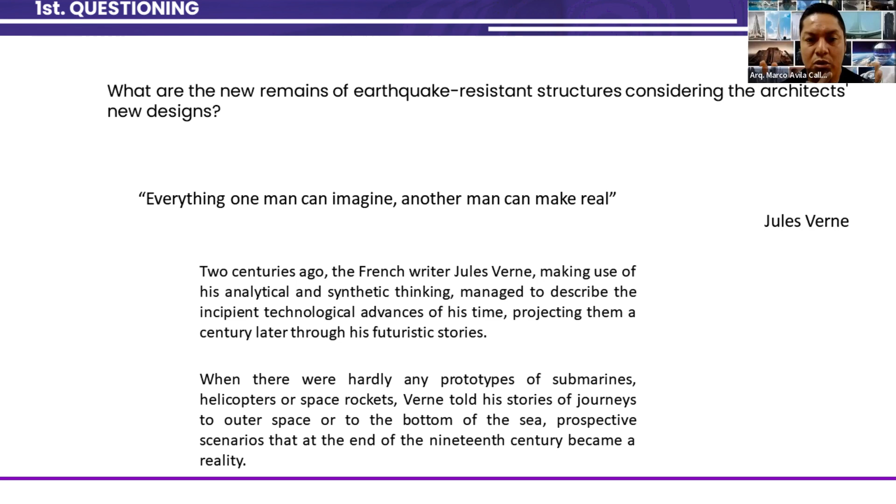In this perspective we begin our analysis. We want to know where the earthquake-resistant structure and the human being's habitat is heading in terms of the design of housing, in terms of the design of buildings, etc. For this,

considering these visions, we need to analyze theories. We had to analyze theories of the future and we basically based ourselves on 3. The first theory is Dator's theory, who mentions in his research a very interesting concept, because he considers that there are 4 possibilities in order to generate probable futures.

He says that there could be a first stage where the story or events continue without any problems, however there is always going to be a limit. If the human being remains disciplined in a certain way, it will continue without changing, but there will always be historical events that unfortunately generate a decline or a collapse of the social, cultural situation, etc.

And that has been seen through time. Several Greek, Egyptian, Roman cultures, etc., have declined due to an event, whether natural or human, but they also indicate that there could be another event that instead of causing a collapse, can transform and make this curve rise. This transformation can be new technologies, business factors, etc. This is the first theory we have studied.

The second theory on which we rely to make this analysis of the evolution of man's habitat is precisely the theory of Nikolai Kardashev, who indicates that there are 3 types of civilizations depending on the use of energy at the macro level, according to the scale. The first type of civilization, type 1, is that civilization that manages to satisfy its own needs by taking advantage of the energy issue of the planet. Maybe we are really struggling to get to a sustainable aspect.

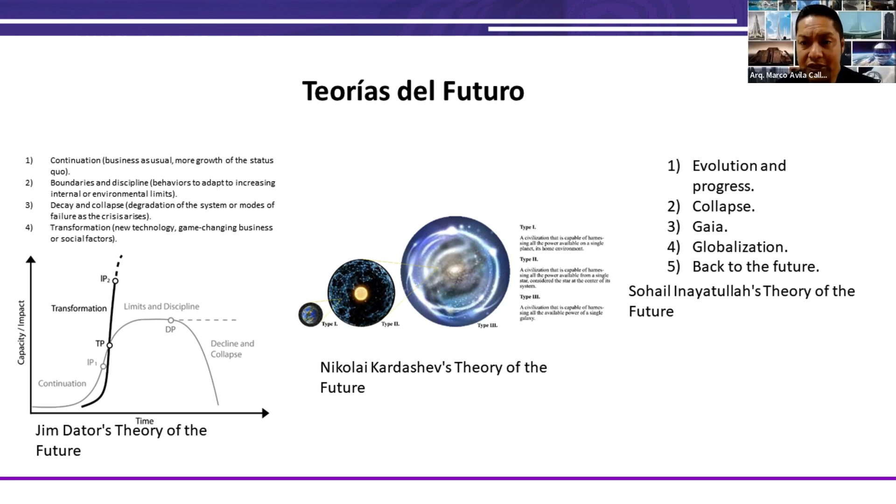And the third theory of the future that we have analyzed is the theory of Sohail Inayatullah, and this researcher proposes 5 scenarios through his research. He proposes a scenario of evolution and progress, a scenario of collapse, and a scenario known as Gaia, which we are going to analyze as globalization around the world. I will rather specify this last theory of the future of this researcher, because it is on the basis of this that we are going to work during this exhibition.

Well, once we have studied the theories already established, what we have done now is try to see how this could change the hypothetical future of human habitat architecture going forward.

These hypothetical futures have been based on Sohail's methodology, and each has been deepened. It has been shown that each of these scientific evidences has generated proposed scenarios with scientific content, based on the three theories of the future analyzed. Each has some similarities, and others have some differences.

However, based on the theories that each researcher handles, we hypothetically propose a future of chaos, a future of Gaia, a future of progress, and a future of evolution. These four futures are the ones we have proposed, and we want to see if they will be generated or not within a horizon of 2100.

Which one is this? What is this methodology for future studies that this researcher proposes? This methodology has 6 well-defined steps.

The first step is planning. The second step is anticipation. The third is the timing of the future. The fourth is to deepen the future. The fifth is the creation of alternative futures, and finally, the strategies to transform those futures.

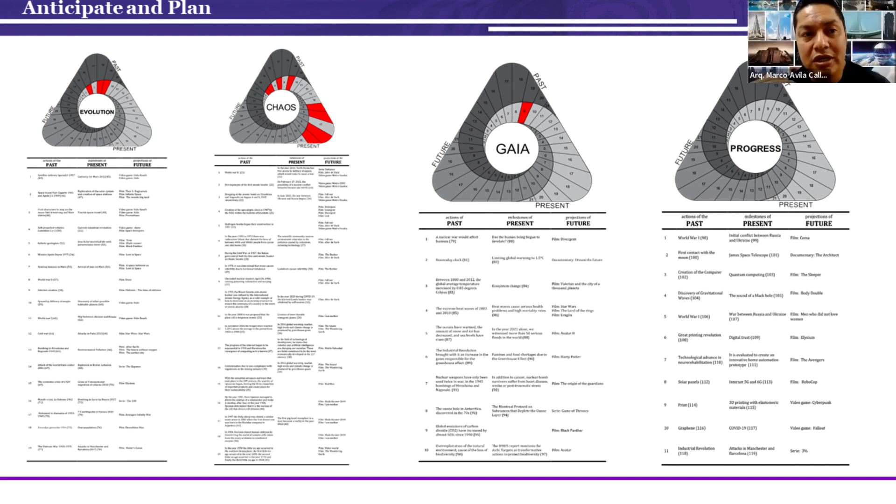In the stage of temporizing and deepening, after choosing these four great scenarios, we analyzed the stages, the times, the epochs of how they were generated, and what the important milestones were through history that allow us to build a timeline of chaos, of progress, of evolution, and of Gaia. For this, we made a representative image showing the present, the past, and the probable future, with a horizon towards the year 2100.

What does this mean? For example, in the past, in prehistory, we are placing the scientific evidence from the architectural point of view at each stage of history, and how these key milestones transform time and transform events to generate new conditions through history.

One of the most important milestones, for example, is the invention of writing. Obviously, the industrial revolutions are also key worldwide and have generated several milestones. We don't have the most important ones marked in blue here, but the ones in red color are the ones that somehow make the story completely change.

The first milestone in our study is number 18, which in this specific case is the first industrial revolution. The conditions branch out here: first, there's an industrial revolution that is fully developed, with the economic and industrial parts being technified, developed, and growing. But on the other hand, unfortunately, is the beginning of global pollution. Well, that's the good and the bad, isn't it?

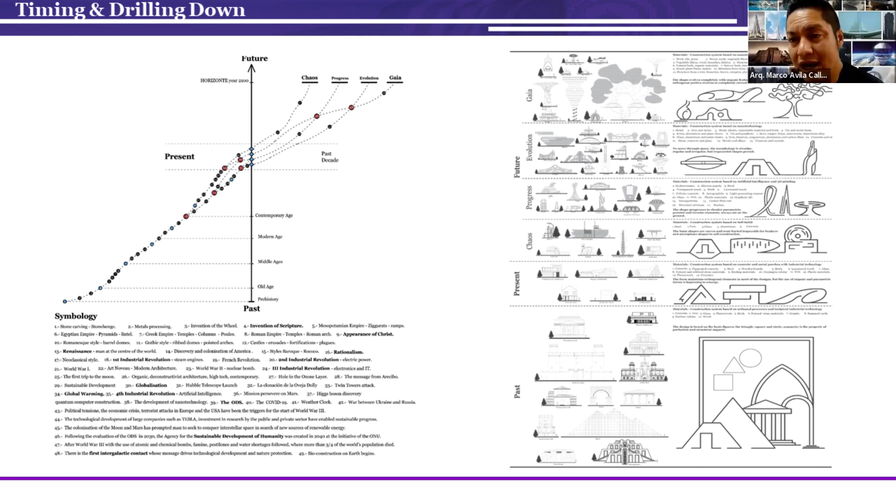That is why, based on the concepts and evidence, we have created these four scenarios. The first scenario is chaos, possibly caused by wars, pollution of the planet, global warming, etc. We would have to live in a chaotic scenario where architecture will have to change completely—a catastrophic theme. Maybe the issue of underground bunkers, reusing what exists at that moment, protection, etc. That is the first scenario.

The second scenario is progress. The progress of the human being is currently maintained with evolutionary thinking. His ability to reason improves. We can combat global warming and there is progress, where cities grow in height, and technology supports a lot in this process.

It is the scenario of progress, the scenario of evolution—the one in which the human being passes to the Type 2 civilization. According to Nikolai, he moves on to Type 2 civilization, where he tries to conquer other places. Technology improves, progress advances, and we have to colonize other places. In this search for colonization, it is up to us to undertake new ways of inhabiting these spaces. We want to go to Type 2 civilization, and why not Type 3? Although I think Type 3 we would be very far away from now.

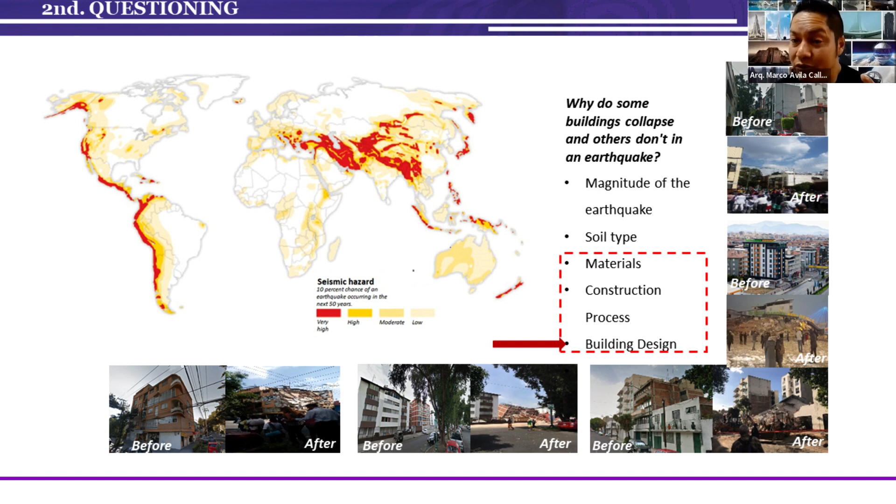Because in the first questioning we saw that the building design was going to be completely amorphous, not completely orthogonal, and this influences the construction of now, the present, and then the future. We began to make an analysis especially on the issue of the design of the building.

We saw that in the past, the initial forms with the pyramids, with the theme of the temples, with the different eras, have changed and have been completely orthogonal, and that allows generating this process.

Then after that we see that the future does change and buildings are going to be completely amorphous elements. This amorphous theme, that irregular theme, that changing theme — it is this new challenge that prepares the future for us.

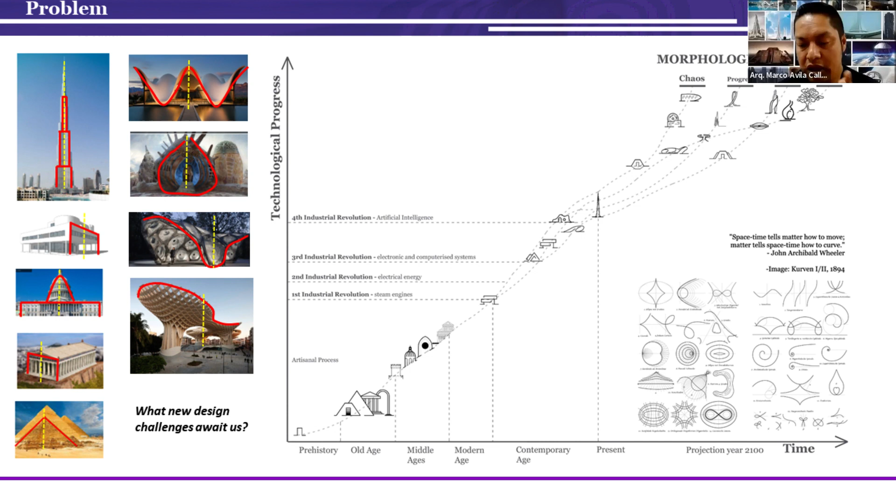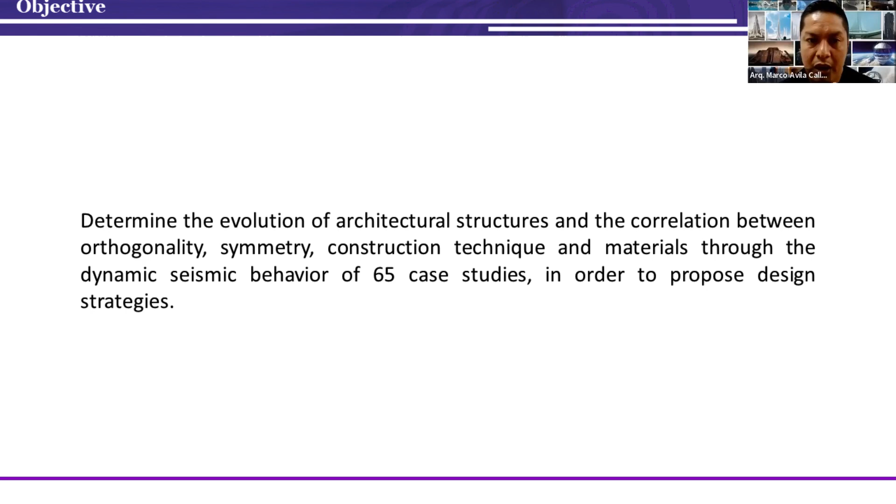To do this, based on the previous results that we had mentioned, we began the research process to determine how in these architectural structures there is a correlation between the orthogonal and the constructive technical symmetry. We based ourselves on case studies from the present and past, and theorize toward the future, again building on what we have already seen previously.

We chose case studies from the past: the pyramids, the theme of Mesopotamia, of the Middle Ages. We worked with the Gothic styles, the Roman style, some temples of some cultures, and in the Modern age, the neoclassical theme.

The modern structure as such in the present, well, some representative buildings, and the scenarios of the future — we have redrawn all of them.

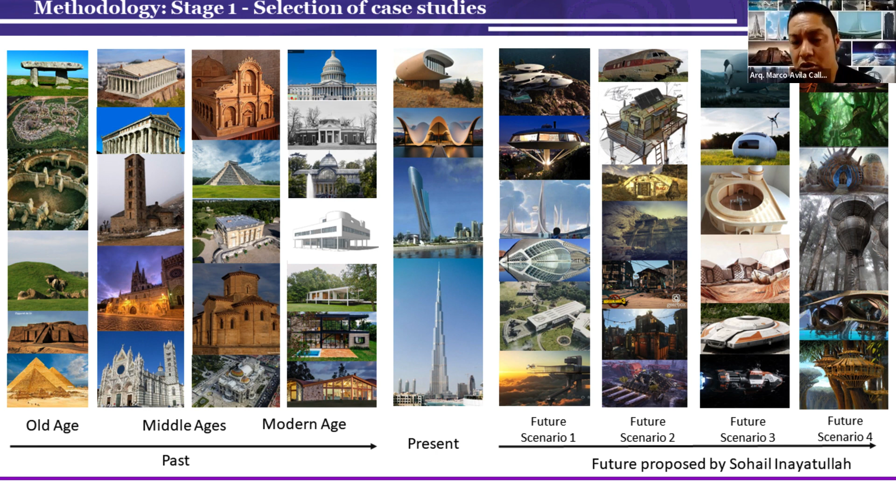The first stage was to make the selection of the case studies based precisely on the morphology, to see how it evolves and what our structural challenges are. Once we have this...

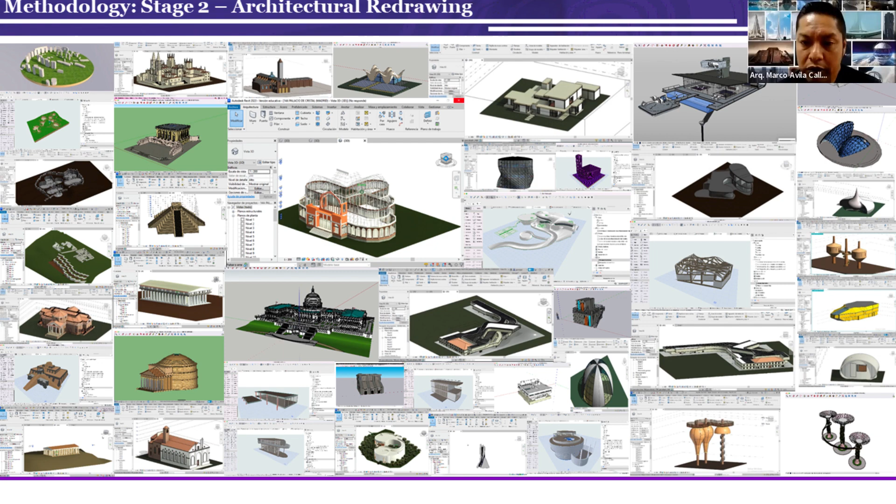In the second stage it was just redrawing. So we did the redrawing of each and every one of these architectural elements based on the structural theme, the architectural theme, to then make an analysis of each of them, a completely structural analysis, based on the properties of each of the materials, the shape of the building and the seismic demand.

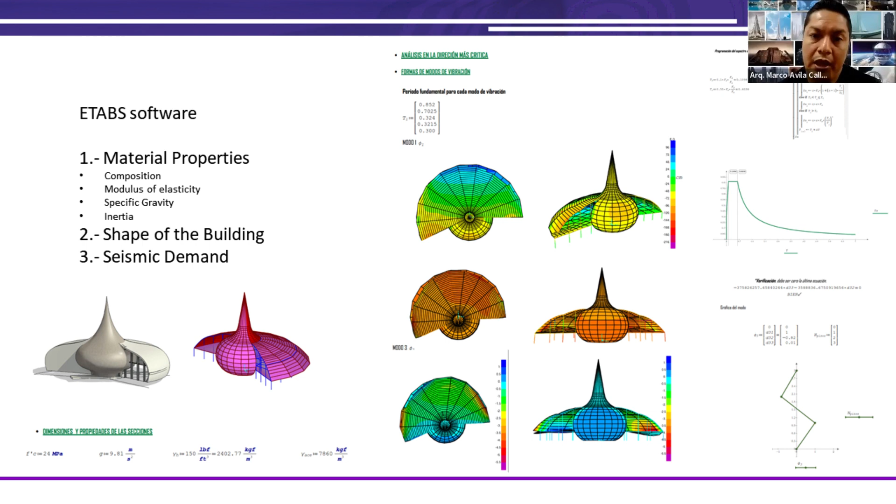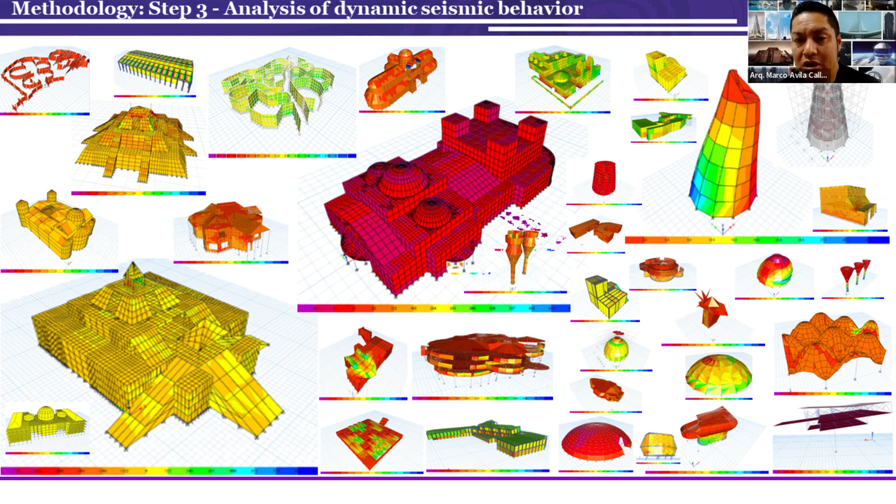We have put a similar seismic demand on all of them to see how it works at the level of experiment. Each of them was modeled and each was subjected to an experiment. In this case, the experiment takes place in this way and it is verified which of them would fail and which would not, depending on the shape, the materials, the constructive system.

The results are very interesting. We have a very big table, and we can summarize it as follows. We have the case study drawn on top, the design, and we have put the design as a completely orthogonal element in the first case; a symmetrical element but not orthogonal in another; and a curved element that we are going to see is completely a random shape, born based on that predicted future.

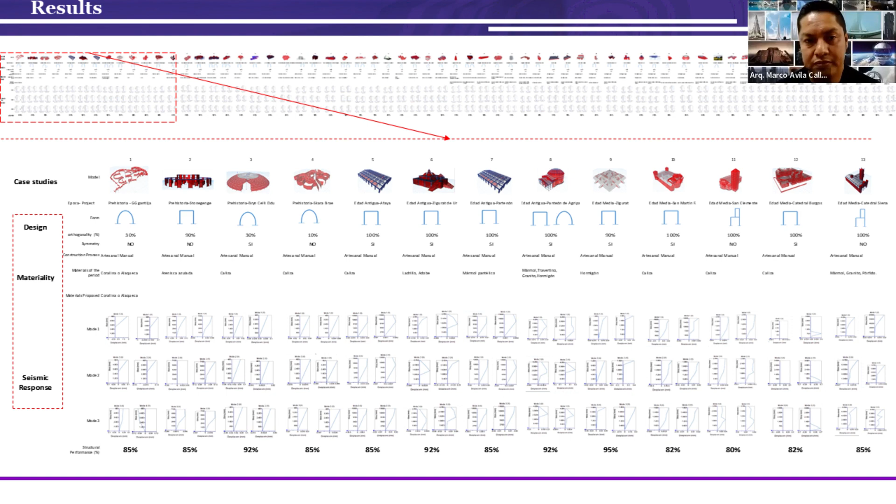We have analyzed the issue of materiality, what kind of material each of them has, and the issue of seismic response — for example, the most important results.

The first result tells us that in cases of study where there is complete symmetry of the element, there is massiveness in the architectural composition, there is complete symmetry, there is fairly minimal displacement in terms of earthquake. We are especially interested in this axis, how much the element moves on the x-axis. On the y not much, and we will see why later. But the seismic behavior is quite suitable for the conditions of the experiment we have proposed.

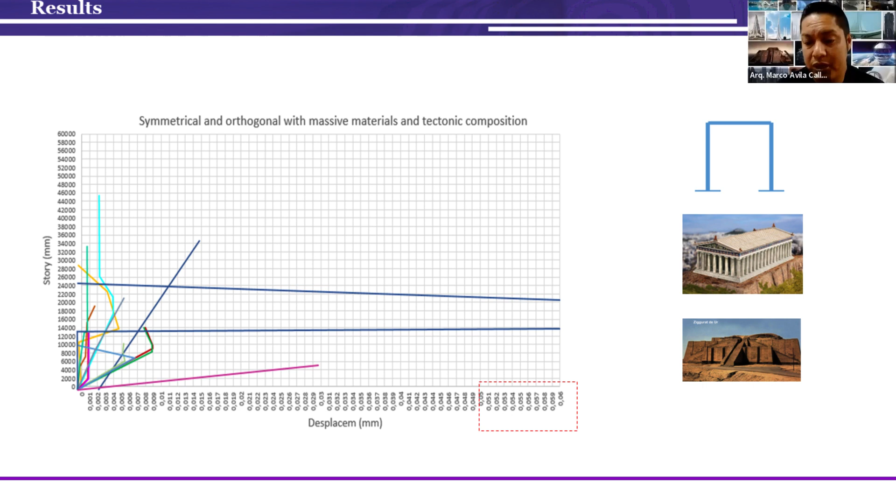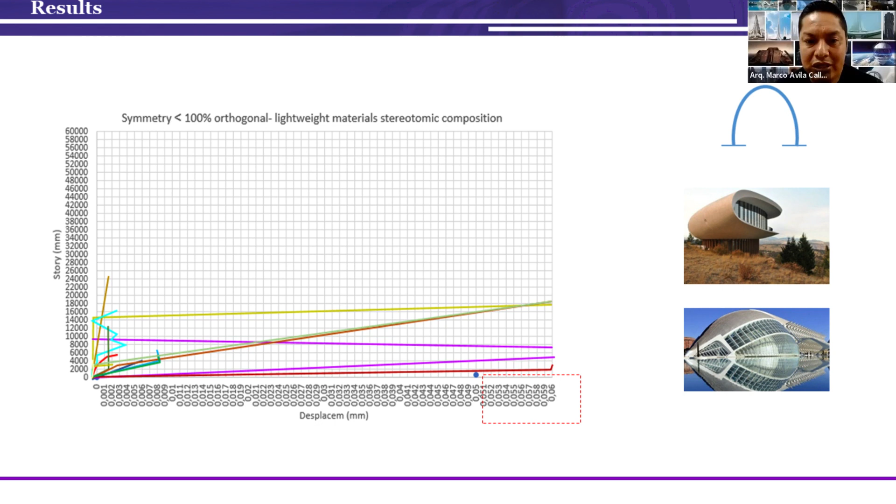What about those non-orthogonal but symmetrical elements? Similarly, if the component is not orthogonal but symmetrical, it also meets an appropriate parameter at the time of a seismic event. What about those elements that are not symmetrical and start to become more slender?

We already started to visualize those elements of the future. The seismic demand begins to become more complex. The issue of the movement of the building becomes more complicated and the displacement is broader, and that has to do with the issue of materials as well.

Remember that since the Industrial Revolution, steel and concrete have allowed us to create architectural works in height, where the structural part is key, because the massive weight of the pyramids and temples is reduced in a certain way, where it was completely massive and becomes more slender. And in this case, there's a latent seismic hazard.

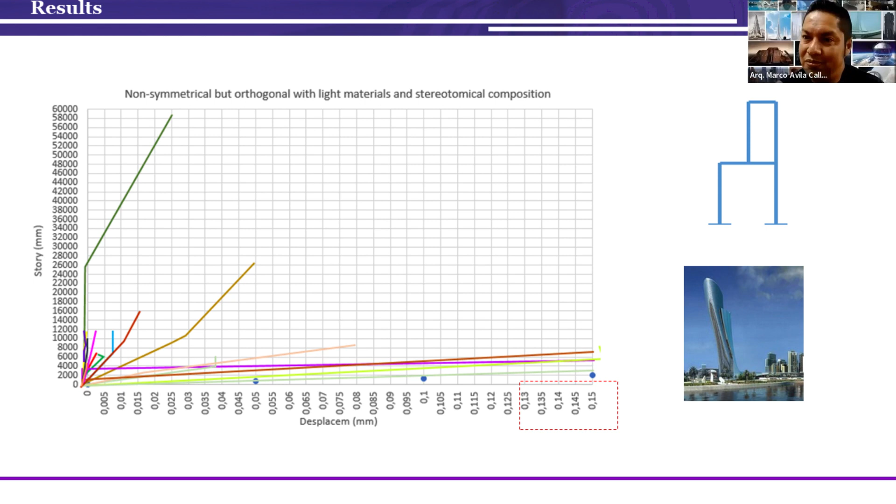What would happen to those completely non-symmetrical, completely lightweight shapes that completely change this new panorama? Similarly, there is a problem at the time of a seismic event. There is considerable displacement. Yes, considerable. We see the past, we see the present, we see the future.

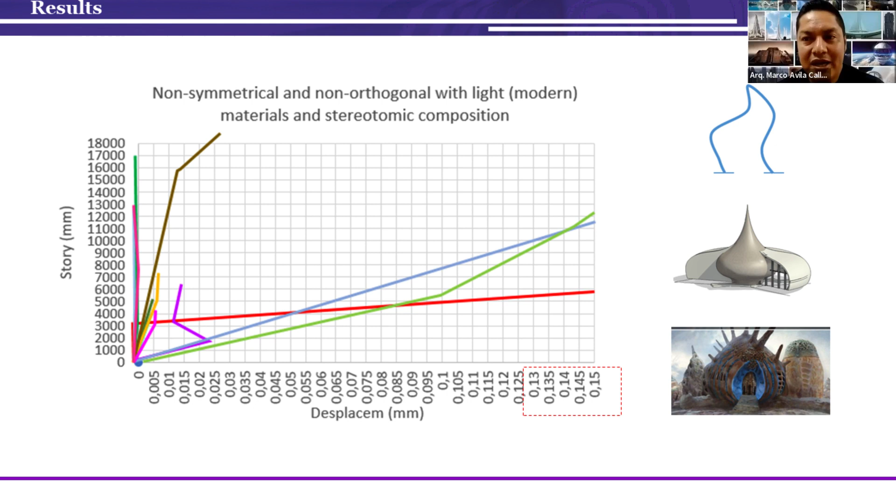But well, what would be the solution? For this, what we have done is the following. We already have the probable future, completely curved architectural elements. What we have done is analyze and study new materials, this is the key. The future is going to be completely different.

As for the architectural part, the issue of materials, we are analyzing and studying new materials that are in experiment: graphite, graphene, carbon fiber, biochar, including materials such as transparent metals, etc., which allow creating new constructive forms, improving the structural theme. That is why we have the architectural form and the new materials we experiment with, and we see that when generating this seismic analysis, this seismic risk completely lowers.

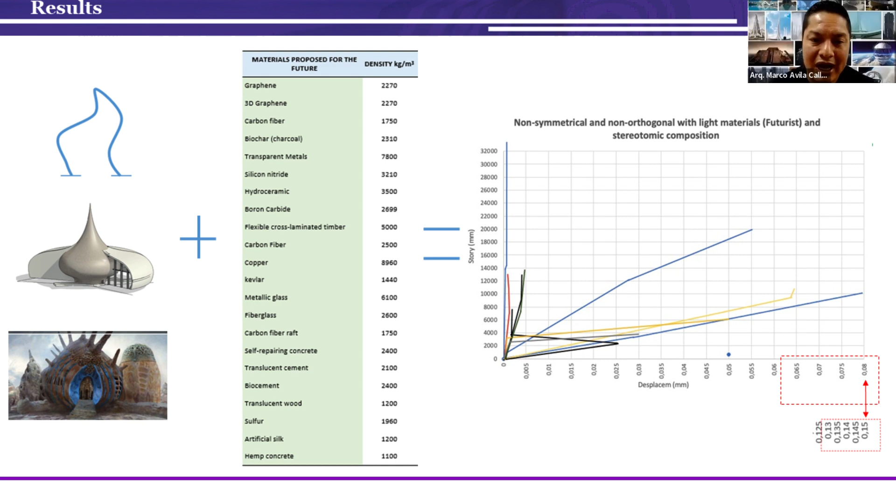In such a way that we show that for a probable future, obviously the first conclusion is that it will change, that there will no longer be, or with the theme of 3D printing, with new technologies, the architectural form changes completely. New materials are key to making these elements much safer.

As a conclusion of these two questions that we have raised in this paper, we can identify that more than 80% of cases, especially from the ancient and Middle Ages, have a completely symmetrical composition and allow greater stability and seismic resistance, undoubtedly. But beware that these elements of the past, which are massive, which are symmetrical, which resist until now, we have the evidence.

Unfortunately, they are very massive, the walls are very wide and take up a lot of space if that's what we want to do today. Unfortunately, the space that we don't have in the architectural part is very affected.

That is why in the modern age, despite the fact that spaces are reduced with the appearance of concrete and iron, only those orthogonal elements are those that resist. And those symmetrical elements resist the process of a seismic event.

If we go to the future, we see that the future is going to change the shape. But unfortunately, with these new forms, if we do not put emphasis on new materials and new constructive technologies, it will not be possible for them to resist large seismic events, clearly speaking. That is why, as a final conclusion, it is of vital importance to propose a line of research on new materials and new construction systems.